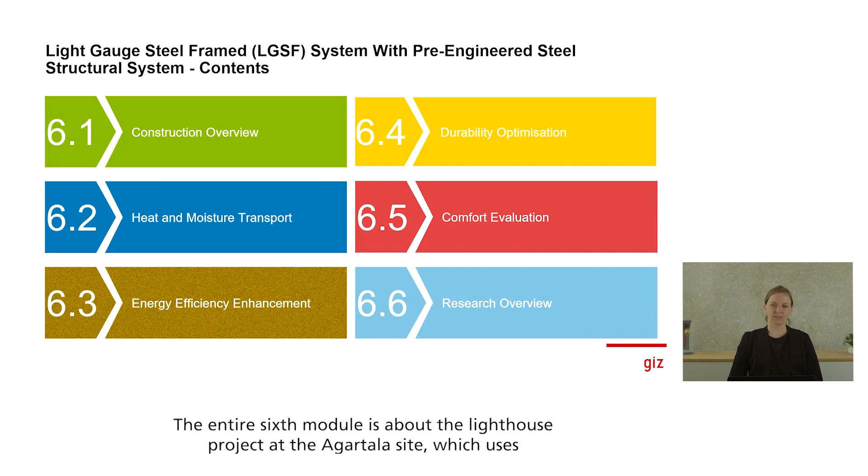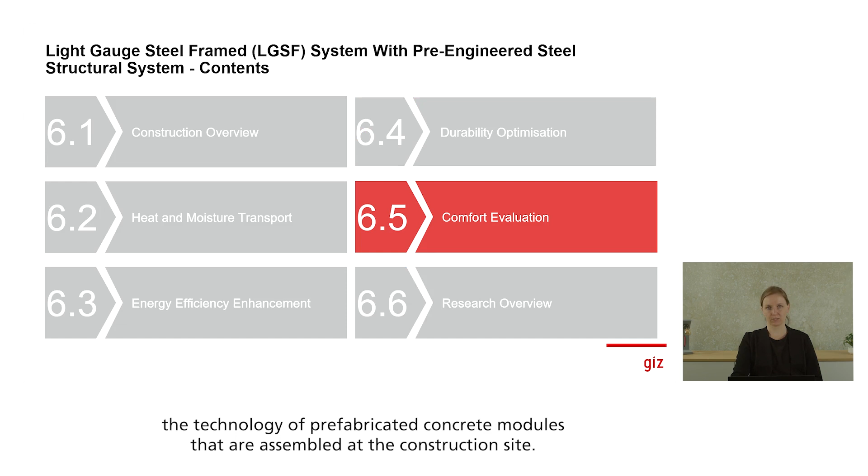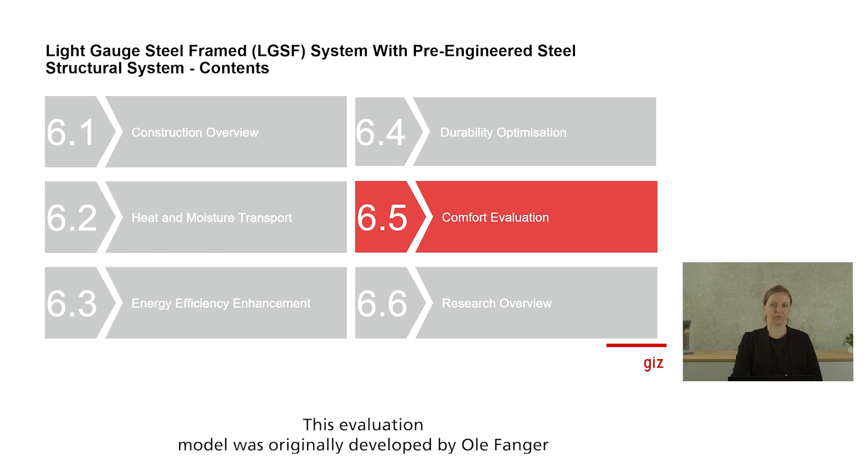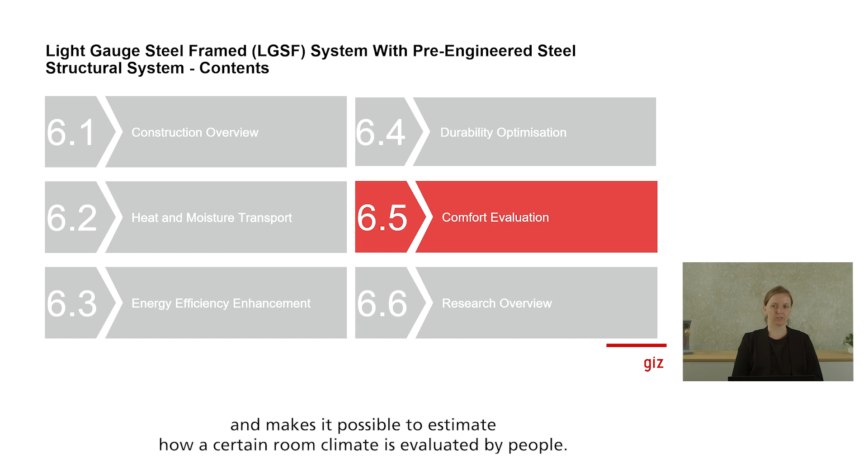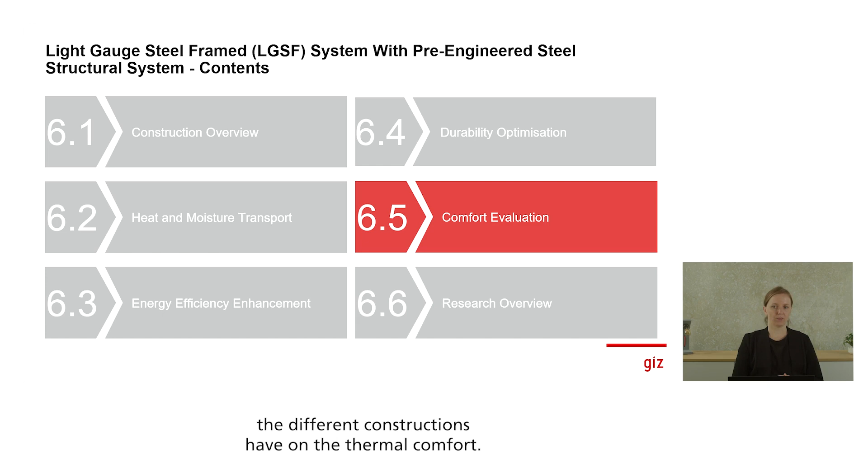In the fifth part of this module, we review the basis of thermal comfort assessment. In particular, we will again discuss the so-called predicted mean vote, PMV. This evaluation model was originally developed by Ole Fanger and makes it possible to estimate how a certain room climate is evaluated by people. In this unit, we will also see how this evaluation method can be adapted to specific conditions, for example to predict comfort in buildings where air conditioning is not installed. In addition, I will show you some simulations where we will see what influence the different constructions have on the thermal comfort.

But now let's start with the recap. It has always been difficult for building designers to plan a building in such a way that all people with their individual needs feel comfortable in it.

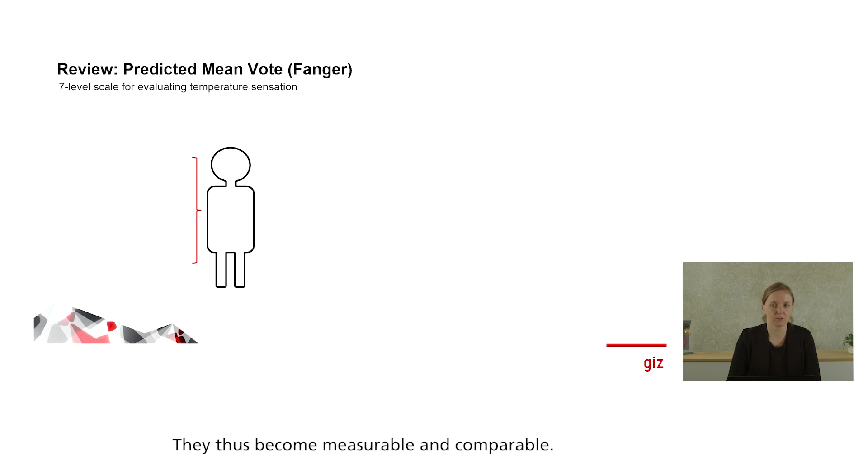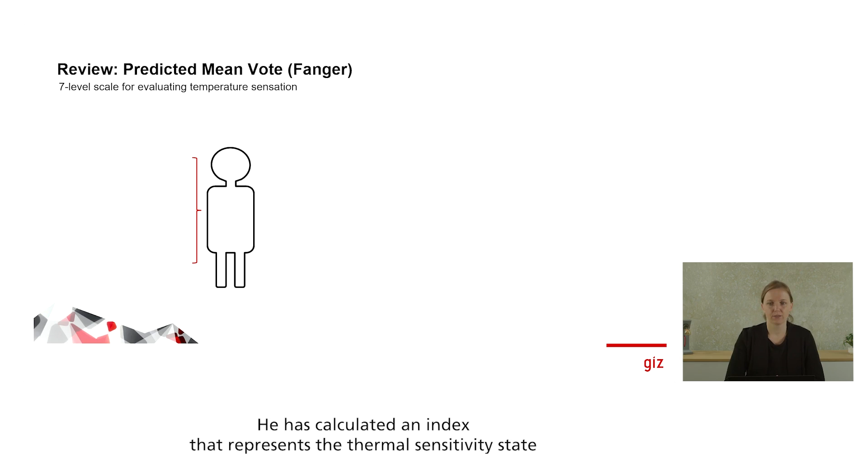Ole Fanger had therefore developed a model that can be used to quantify people's individual requirements. They thus become measurable and comparable. This data can then be used for the planning of comfortable buildings. He has calculated an index that represents a thermal sensitivity state from a combination of physiological and physical variables. He has invented the so-called predicted mean vote, PMV.

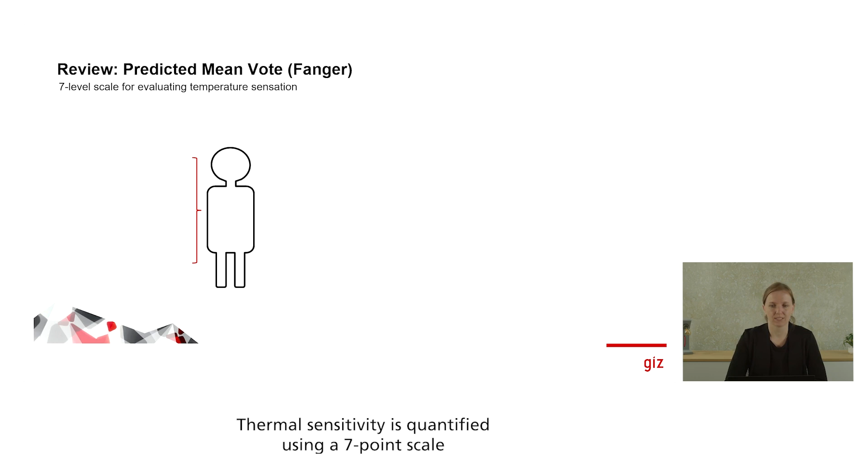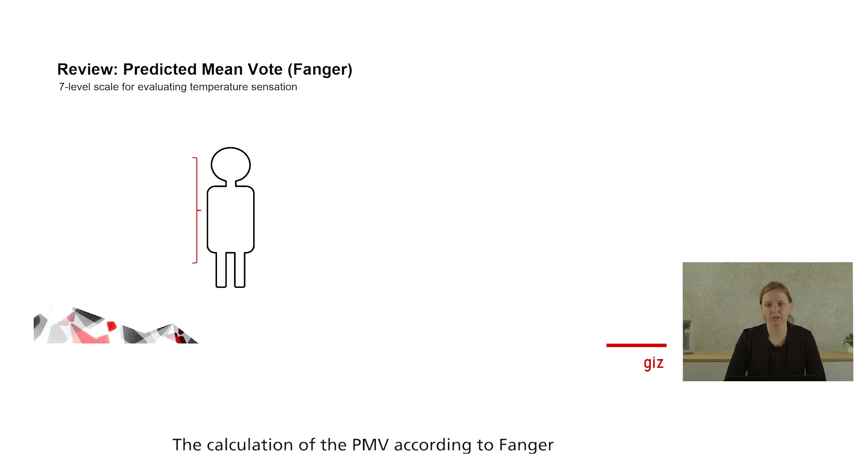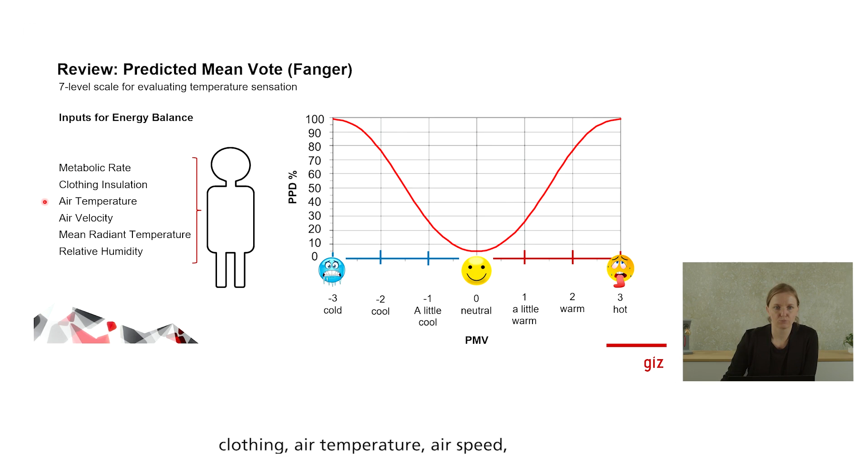Thermal sensitivity is quantified using a 7-point scale representing the expected average rating of the indoor environment. The calculation of the PMV, according to Fanger, takes into account various factors that affect people, such as metabolic rate, clothing insulation, air temperature, air velocity, mean radiant temperature, and relative humidity.

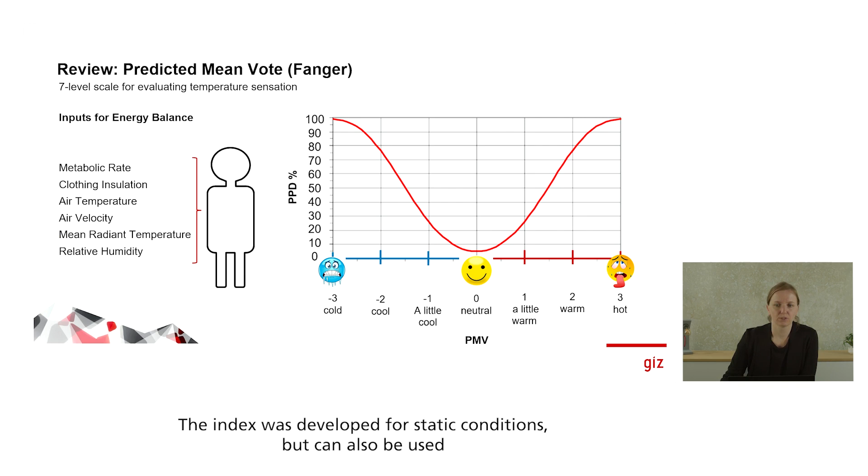This index was developed for static conditions, but can also be used when there are slight changes in the influencing variables. Then you have to use the time-weighted mean values of the changing parameters for the calculation.

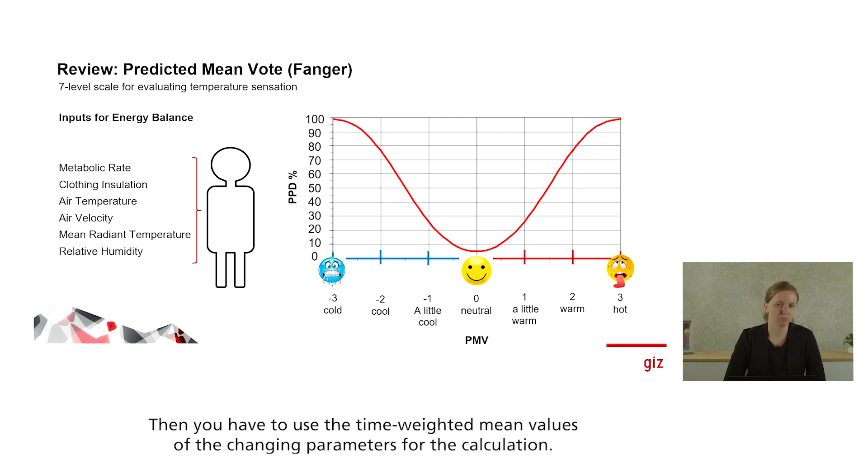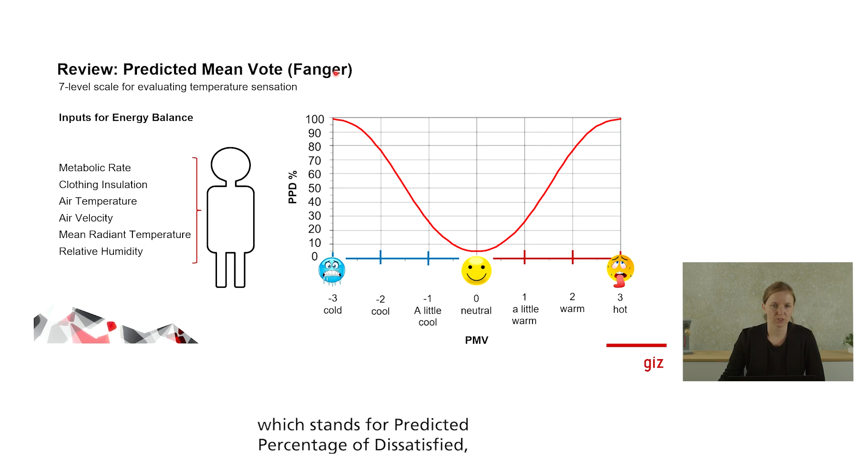From the PMV, in turn, the PPD can be determined, which stands for predicted percentage of dissatisfied. That means the percentage of how many people feel uncomfortable at a certain PMV.

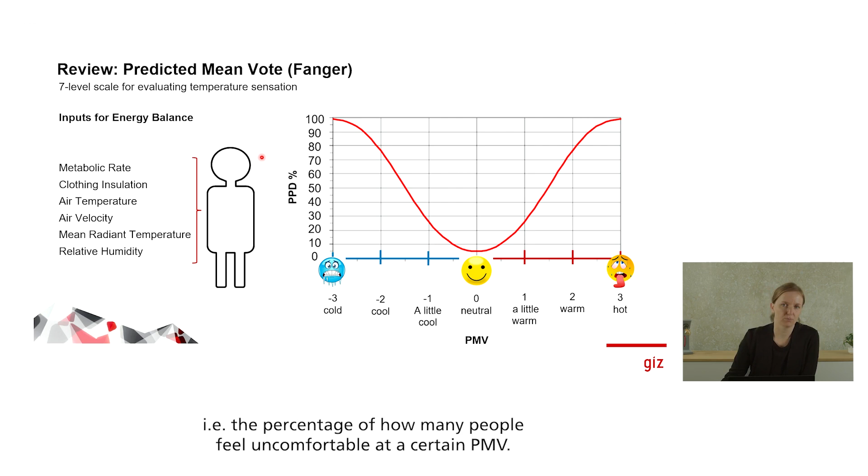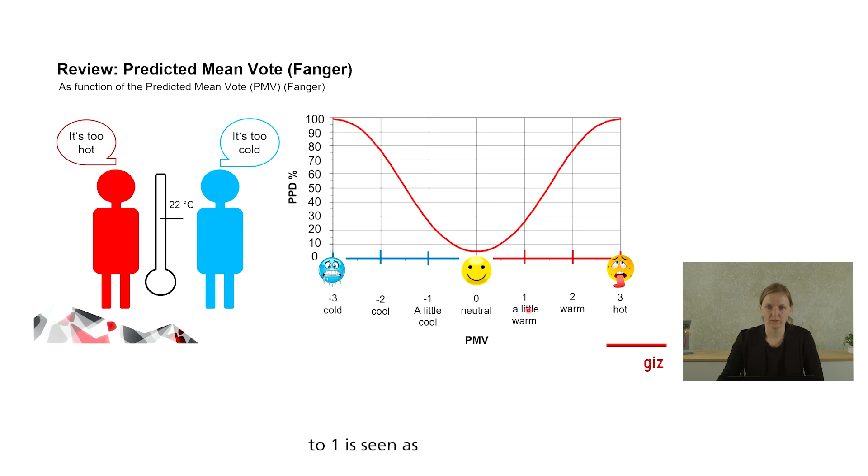If the PMV model is used for building planning, limits must be defined for it. That means a range of the PMV that is still acceptable or not. Generally, a value of -1 to 1 is seen as the acceptable comfort range in building planning. This acceptance field allows for a range of dissatisfied people of 0 to 25%, whereby, according to Fanger, there will never be a case where 0% of the people are dissatisfied.

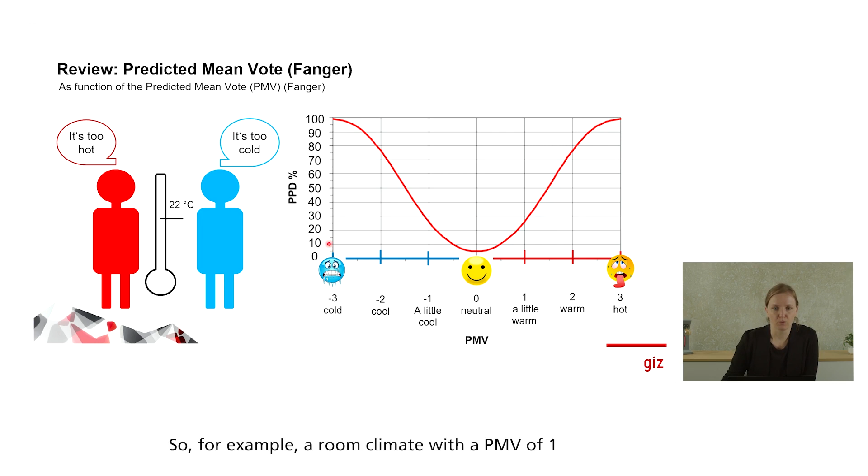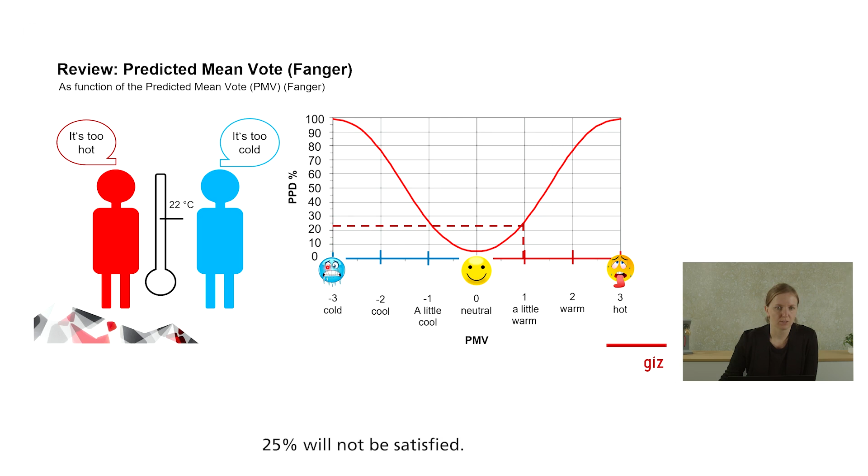So, for example, a room climate with a PMV of 1 says that it tends to be a little too warm, but still within the acceptable range. 75% of the people will perceive these conditions as satisfactory, 25% will not be satisfied.

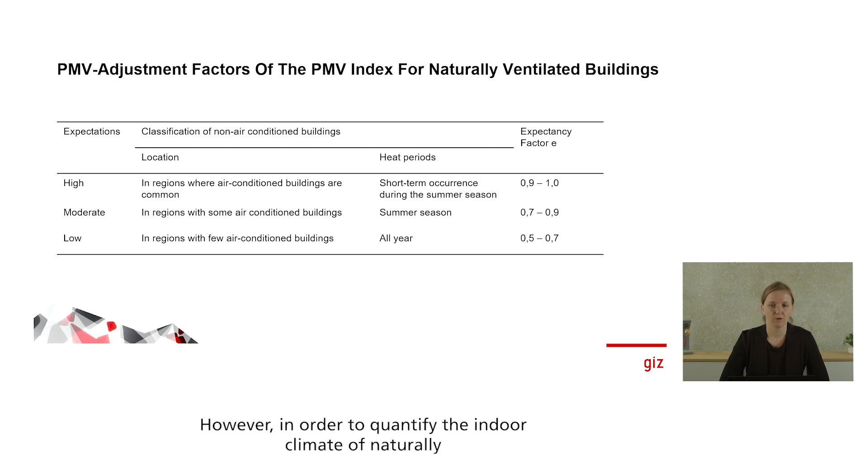The classic PMV model is mainly used to assess the indoor climate of air-conditioned buildings. Investigations have shown that the calculation of the PMV was not entirely accurate for buildings without active air conditioning. However, in order to quantify the indoor climate of naturally ventilated buildings in a similar way, no new calculation method was developed, but so-called PMV adjustment factors, also called expectancy factors, were introduced.

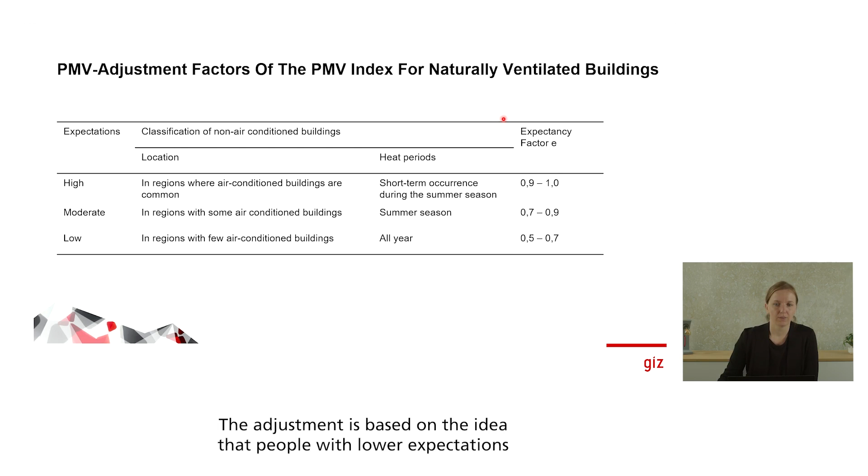To adjust the PMV to the conditions, it is multiplied by a given expectancy factor. The adjustment is based on the idea that people with lower expectations of thermal comfort accept higher temperatures than one would expect according to the PMV model.

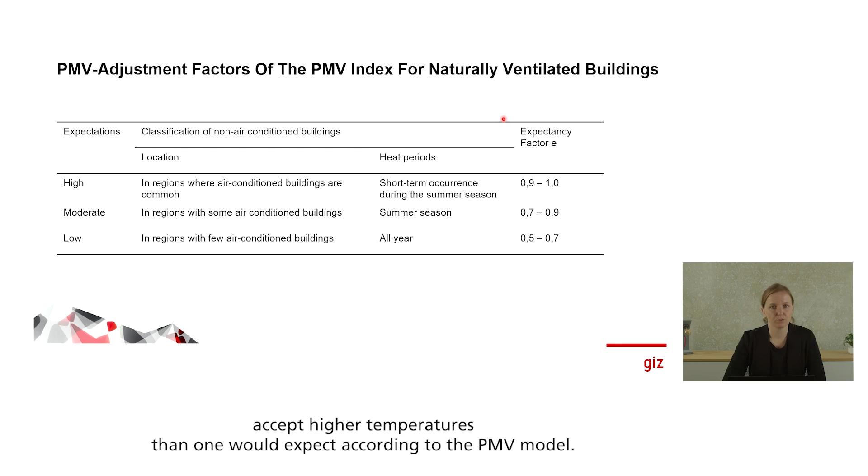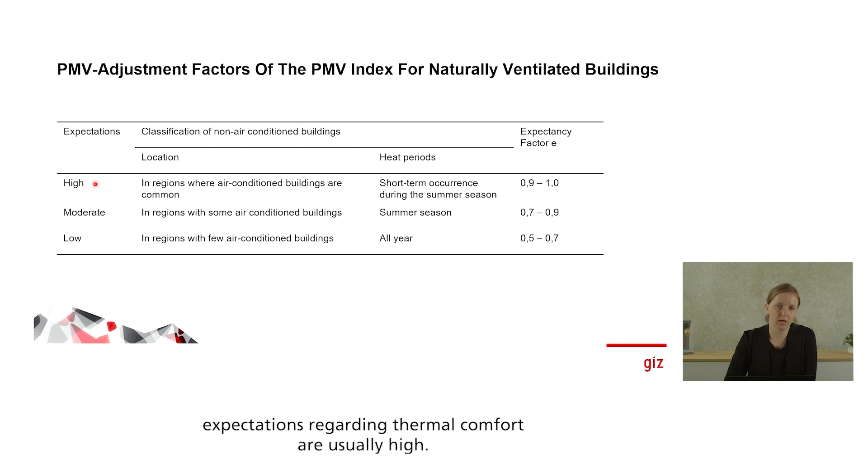In regions where air conditioning is commonly installed, expectations regarding thermal comfort are usually high. This is also expressed in the expectancy factor of 0.9 to 1. If this is multiplied by the calculated PMV, the result hardly changes.

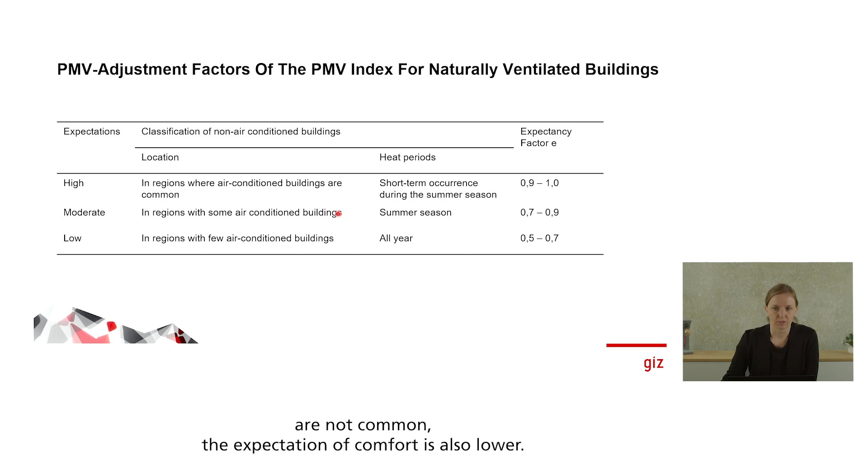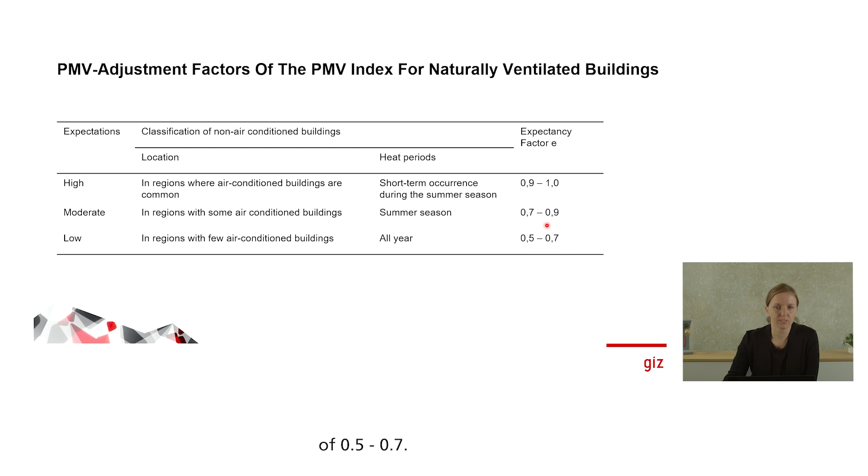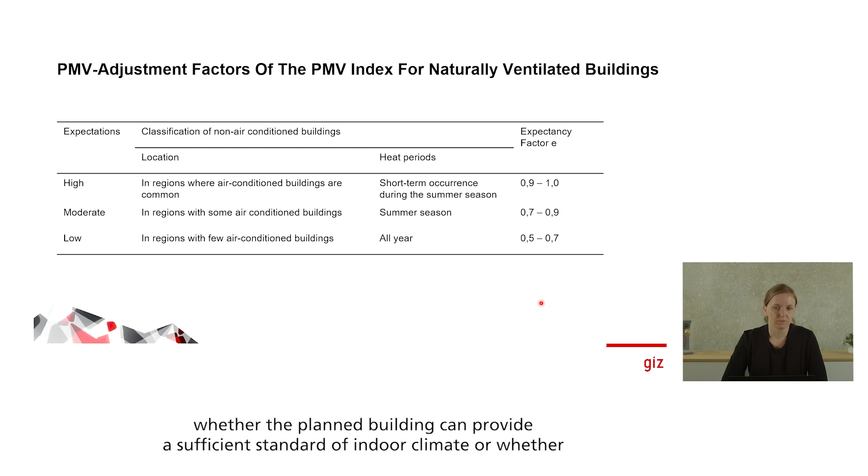In regions where air conditioning systems are not common, the expectation of comfort is also lower. This is evident from an expectancy factor of 0.5 to 0.7. Of course, this has a great impact on the practical planning of the building, meaning whether the planned buildings can provide a sufficient standard of indoor climate or whether it still has to be improved at high costs.

But what does it look like when the adjustment factor is applied to the PMV? And how does it affect the resulting PPD, i.e. the number of people who are dissatisfied?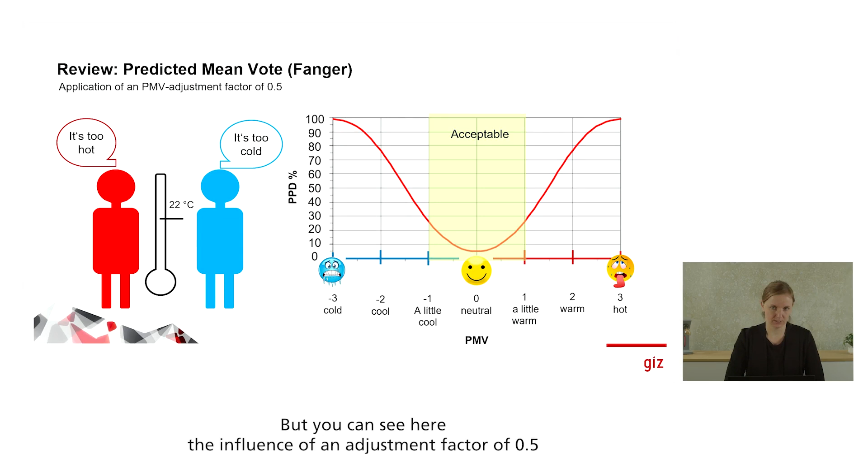We have already seen this diagram, but you can see here the influence of an adjustment factor of 0.5 on the PMV.

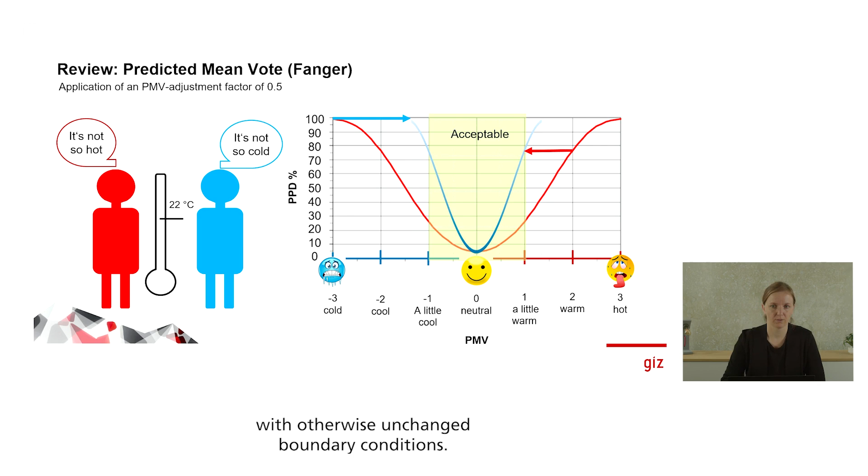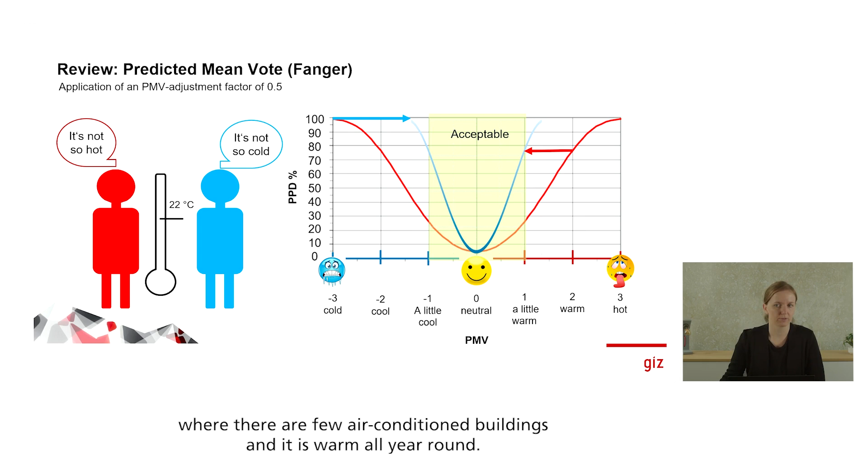Where all the other boundary conditions stay the same. This adjustment factor of 0.5 could be used in a region where there are few air-conditioned buildings and it is warm all year round, so it is sufficient for the buildings in Agartala. You can see the compression of the characteristic curve of the PMV.

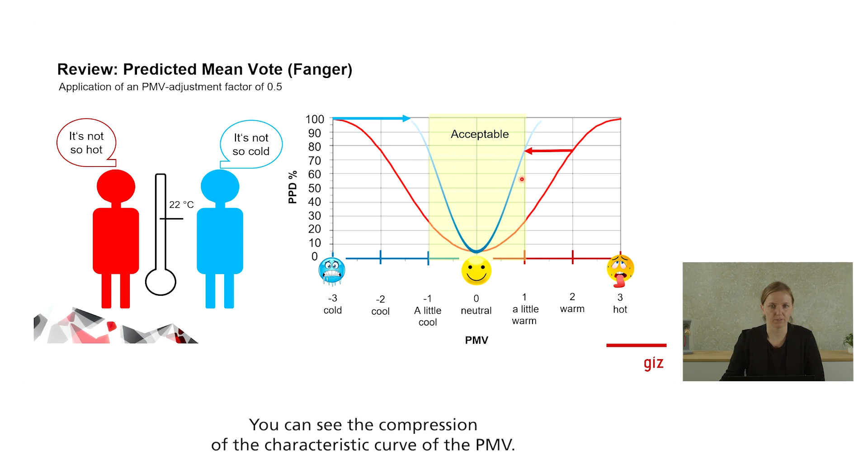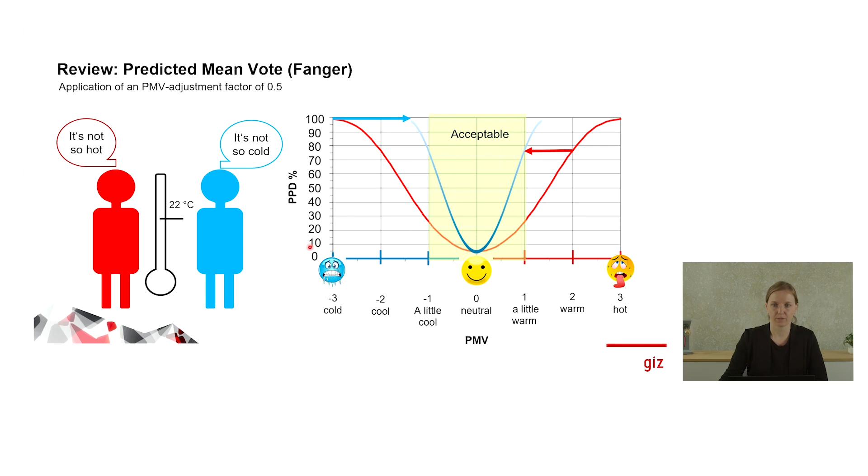This means that many more people accept the thermal conditions and are therefore in the accepted range. The proportion of people who are not satisfied decreases sharply, because far fewer people have a PMV of 2 or 3.

Now, after we have had a look at the theoretical background of the adjustment factor, let us have a look at the thermal comfort in Agartala using the adjustment factors for different building variants. We will look at the impact of a higher heat storage capacity of the materials used in the design and how this affects the PMV with and without adjustment factors.

Various simulations were run to calculate the PMV and PPD values, on which the adjustment factor of 0.5 is multiplied afterwards. But let us have a look at the results now.

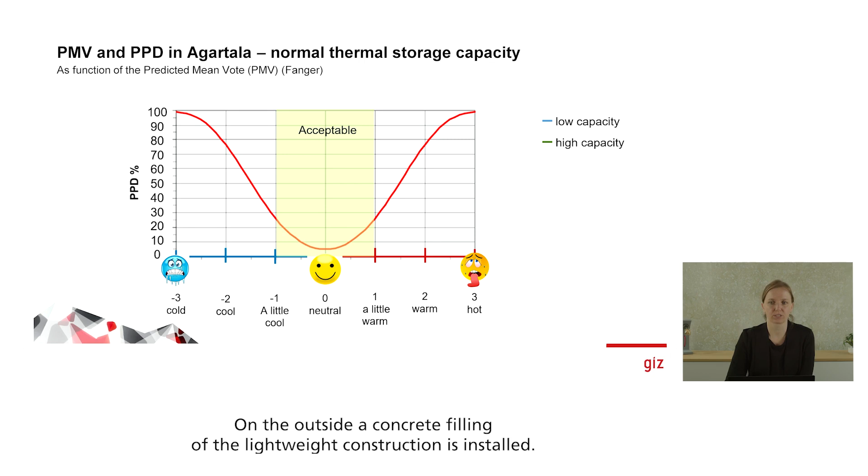As mentioned, two variants have been simulated. The first one is the standard variant, as it is actually built. On the outside, a concrete filling of the lightweight construction is installed. The inside walls are filled with insulation. So overall, the inside has a low capacity.

The calculation results can be seen as blue dots on this graph. We see that some hours are too cool, but the main hours are too hot. If we calculate the mean PMV, it is 1.00, indicating that it is a little too warm.

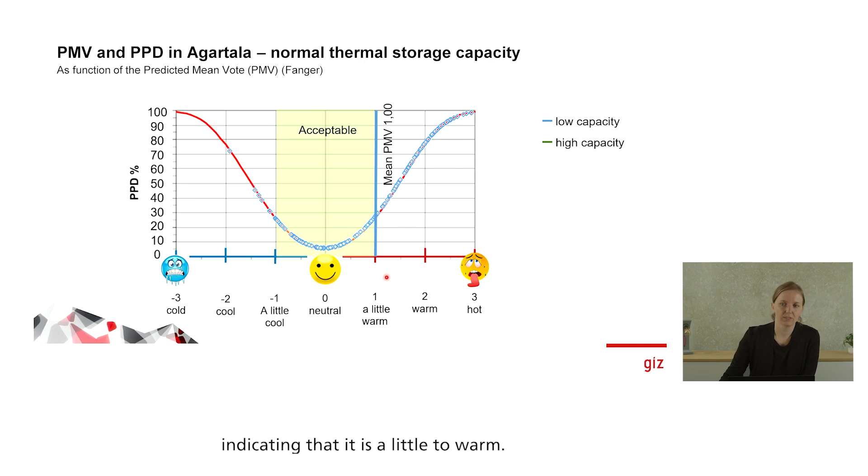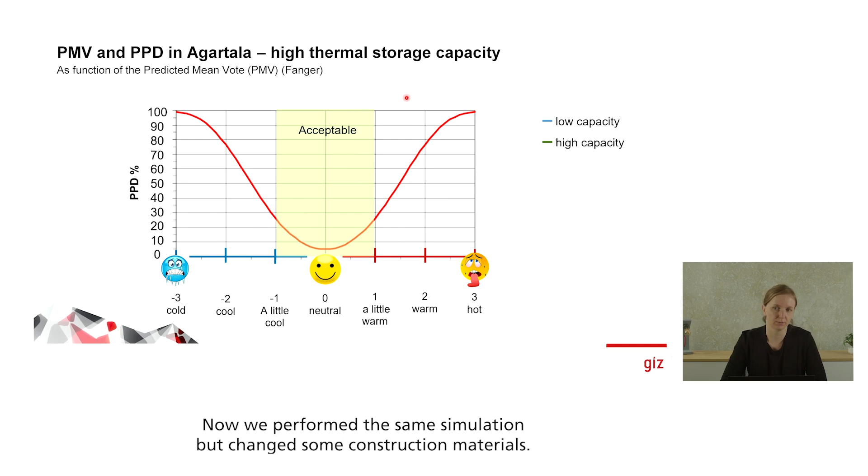Now we performed the same simulation but changed some construction materials. In this variant, we use insulation on the outer walls and concrete on the inner walls. We switch from low capacity to high capacity.

The plot of the simulated PMV can be seen here in green dots. We see that there are fewer hours evaluated as too cool, but more as too warm. The calculated PMV therefore is 1.14, higher than in the variant before.

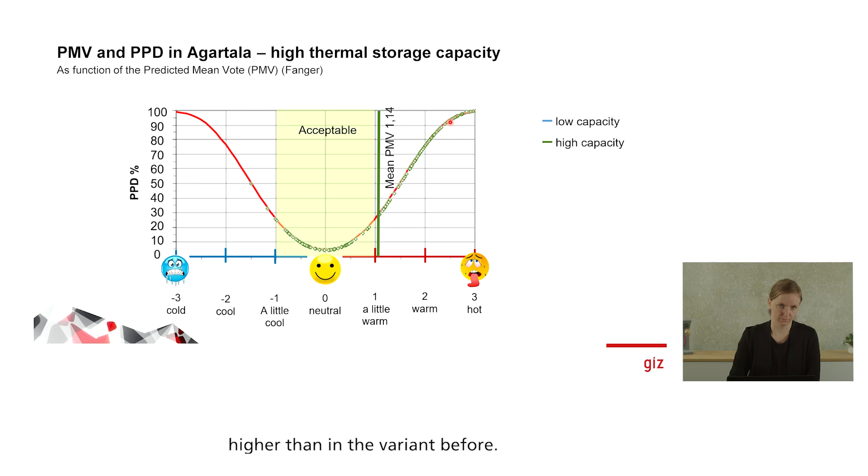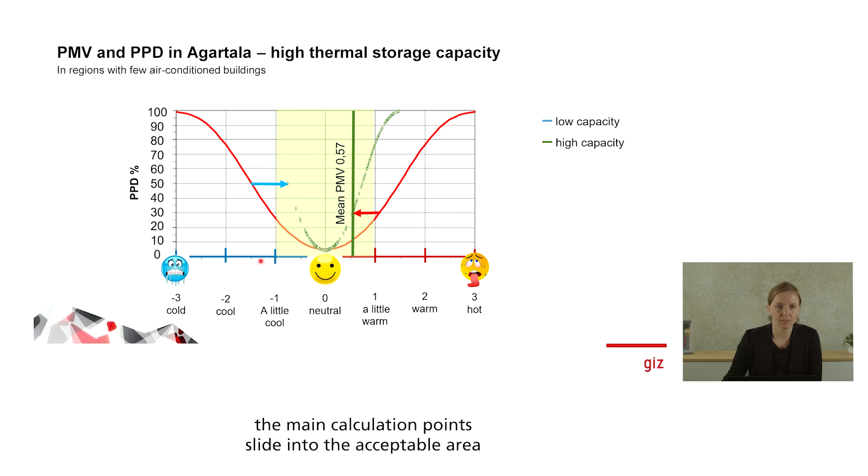If we now apply the adjustment factor to the PMV for Agartala again, the main calculation points slide into the acceptable area between -1 and 1, resulting in a PMV of 0.57.

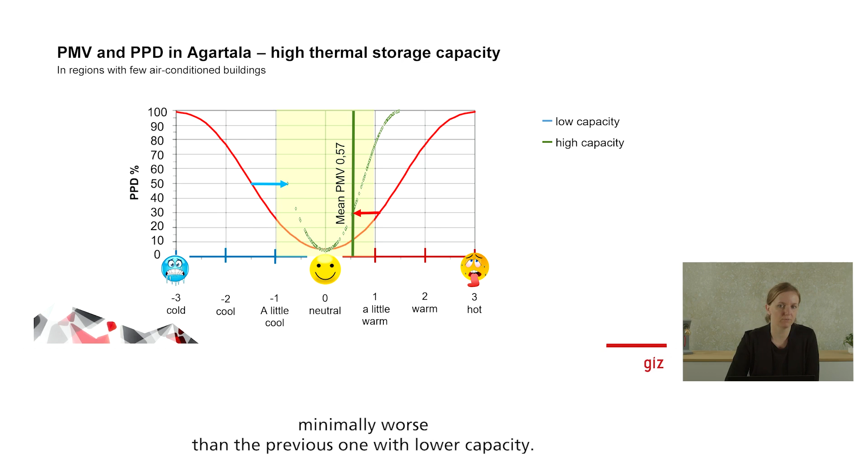As before, we see that the proposed perception now is very good and only some complaints are in the area of too warm. In terms of thermal comfort, this variant with higher storage capacity performs minimally worse than the previous one with lower capacity.

Let us wrap up the lecture. Basically, the PMV and the resulting PPD can be used to evaluate the thermal comfort in specific buildings.

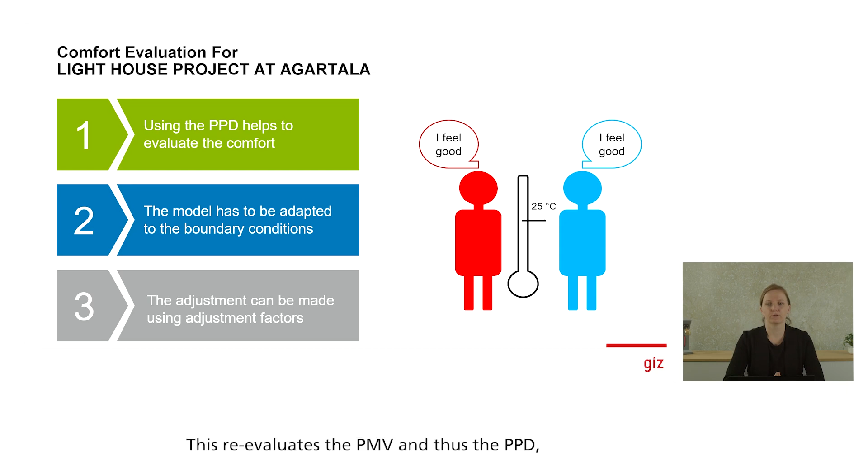For different boundary conditions, one can make use of the adjustment factor to adapt the model. This re-evaluates the PMV and thus the PPD, so that a new planning basis for the building and the expected thermal acceptance is created. And with that, I would like to close this chapter and thank you for your attention.